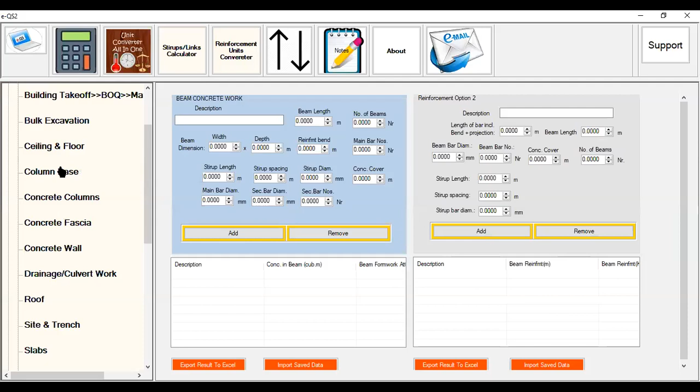Like I said earlier, most of the forms have similar interface. We are currently on column base. If you check beam and concrete in beam, they have similar interface. If you check ceiling and floor, they also have similar interface. They all have input, a button, and then the results below. Then you have two buttons below that allow you to export and import results.

So back to the column base, we start with the description. Before we input the description, let's look at a sample drawing.

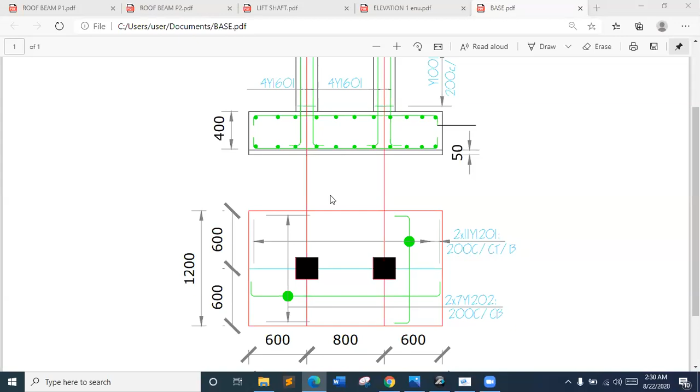Assuming we have this as a sample drawing, this column base has top and bottom reinforcement. Let's say this is BT2 that has top and bottom reinforcement.

Before we do that, we check the dimension. This is the length, and this is the breadth. This requires you to extract the data. This is group B data, which you can just read directly from the drawing. The length is 2 meters.

The breadth is 1.2 meters. The excavation depth is not shown here, so let's assume 1.5 meters excavation depth. The blinding is given as 50 mm blinding. The column base is given as 0.4 meters.

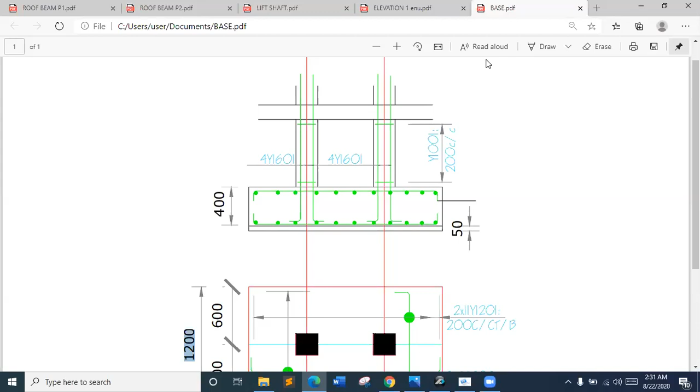Here we are assuming the bottom reinforcement is Y16, and the top reinforcement is Y12. The number of column bases here is just 2 numbers. So we input this data now in the software.

We start with a description. Description, you put base type 2 because we are starting with base type 2. As you can see, it says column base dimension, length. The length is 2 meters. Breadth is 1.2 meters. Number of work means number thereof, or number of occurrence of that particular item.

Which is base type 2 column base. From what we have here, it's 2 numbers, so you change this to 2. The next is the excavation depth.

The excavation depth we are using is 1.5 meters. Blinding from the drawing is 0.05 - it's 50 mm in the drawing, but you should be cautious of the units of measurement beside each of the boxes. Here the unit is in meters, so we have to convert it back to meters.

The next is the footing. The footing is supposed to - this is an error, this should be meters. So the footing is 0.4 meters.

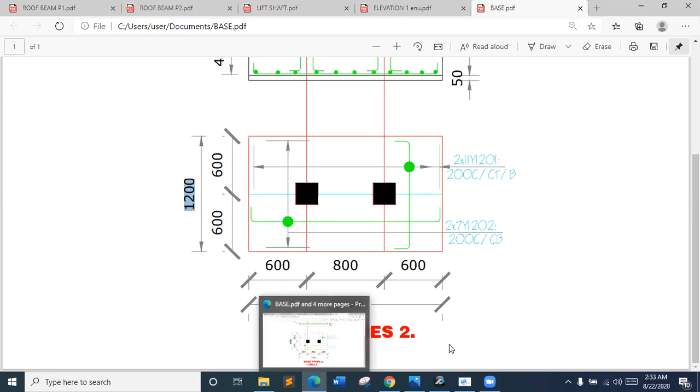Then the concrete cover - let's check if it's given here. Okay, the concrete cover is not given, but we can use 25 mm. When you convert 25 mm to meter, it's 0.025.

The next is length bar diameter. The column base has length and breadth, so this form even allows you to input different diameters. If, for example, the length side has Y16 and the breadth side has Y20, the software allows you to input different diameters. But in this case, the length and breadth have the same diameter, so we are using Y16 as the length bar diameter and Y16 as the breadth bar diameter. Then the spacing is given here as 200 centers to center.

So we change it to meters, that's 0.2. The length side spacing you provided, the breadth side spacing you provided. So when you are done, you click add, which is calculate.

So with that, we have the result in the form below. The description is for base type 2. The next is volume of column base excavation, 7.2 cubic meter. Then the next is leveling and compacting, 4.8 square meter.

You see, the result page here has columns and rows. Each of the columns, or each cell, has a title at the top, and the title has a unit of measurement. Here you see leveling and compacting, the unit is there. Anti-termite, the unit is there, which is in square meters.

Earthwork support, blinding, column base concrete, formwork to edges of column base, then the reinforcement also, because the software allows you to input a different diameter of reinforcement for the length side and breadth side of the column base.

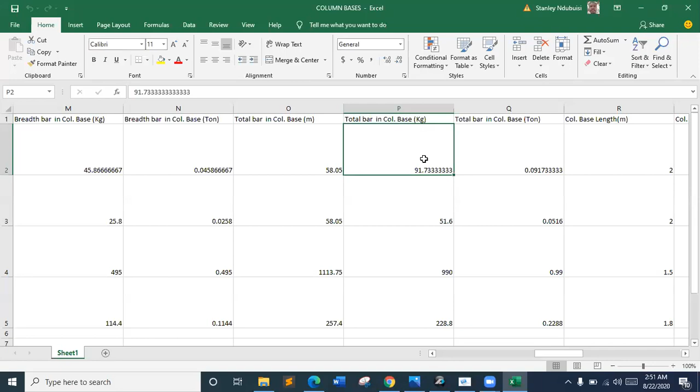If you are interested in the total, and you have the same type of reinforcement in the length side and the breadth side, you can get the total from here. So here the first row is Y16, take note of that. The second row is Y12, so you can decide to sum up all the Y12 rows.

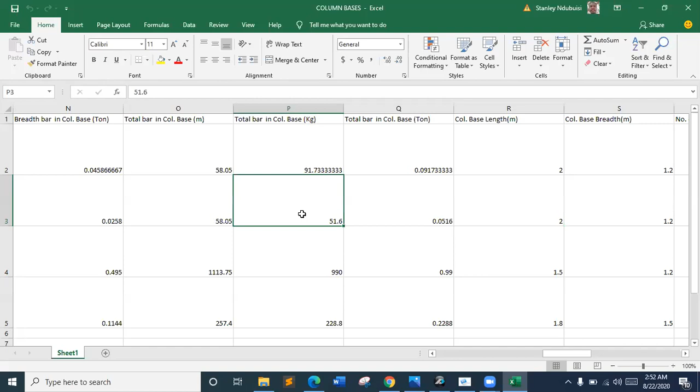The third, fourth, and fifth rows are all Y12, so you can navigate to the total reinforcement in kg. Since rows 3 to 5 are all Y12, you can just drag to sum, then record this on a sheet of paper. The total at the base here is 1270.4. Then you know the first reinforcement is Y16, and you record that. This is the last column that gives the values for results.

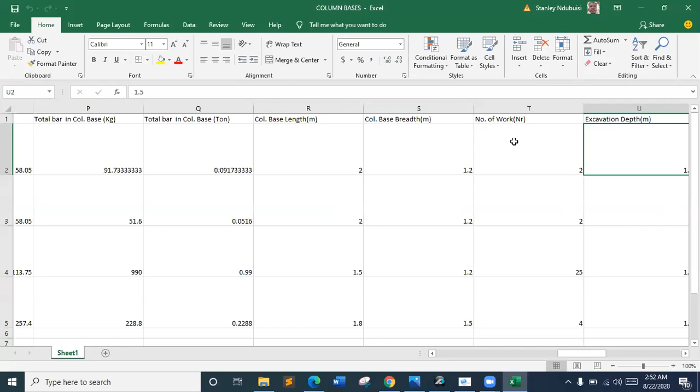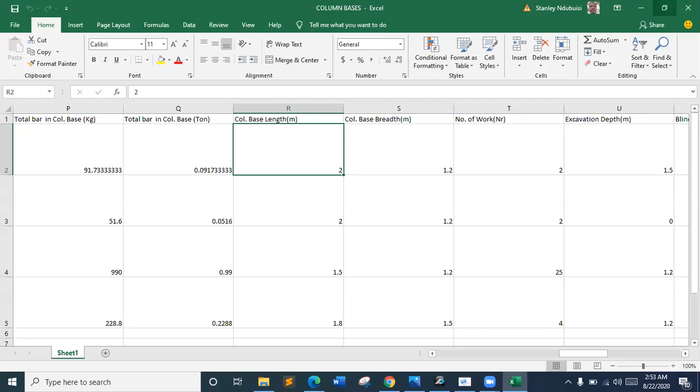The other columns are the input values, like the length of base type 1, the breadth, the number, and others. If you also want to make a correction, you can import this page back into the software and make a correction. To do that, you need to close the page first.

It's also important to save because if you click on any other form on the right side and go back to column base, the page will be empty. For example, if I click ceiling and go back to column base, you see it's empty. Or if you close the software and open it afresh, it will show a blank page.

But you can import the data you saved earlier by clicking import saved data. It can take you anywhere on your computer, but if you check and confirm you're on the right file path, just navigate to the appropriate folder and select the appropriate file. It will bring back all the data you saved earlier.

It's running all the data back into the application. Now it has returned all the data into the application. So if you want to make a correction, let's say on the first row, you click on it. Immediately, it will populate the input boxes with the data that yielded these results, so you can make any correction.

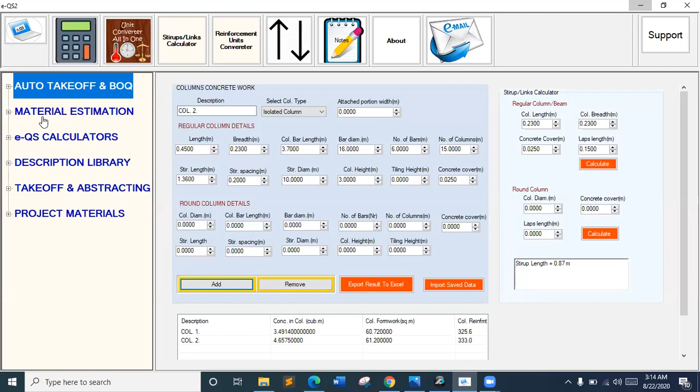If you want to open another page, you can minimize the software. So when you minimize, you go to your desktop. Okay, let me open the desktop. On the desktop now, you can open another page, so you can have more than one session running. If you hover your cursor at the icon at the bottom, you have 2 pages open.

You can open more than 2 pages. This one is for the column. You can decide to open another one and continue work, because as this one is running, if I click any page here, it's going to replace what we have here. But before we continue, we'll click save. So this is column, concrete column. We are still saving on the day 4 data page, day 4 data folder.

So let's say I want to continue on the new version, or new page I just opened. Let's say we want to continue with concrete wall. For concrete wall, it allows you to calculate or do takeoff for concrete formwork and reinforcement in concrete walls. Let me open a drawing.

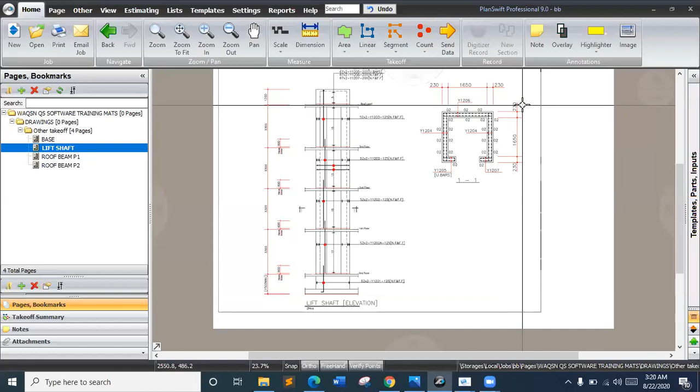So we move to concrete wall. For concrete wall, we are going to use this drawing. This is a lift shaft, concrete wall. So here we need some data.

When you click concrete wall, it allows you to select whether it's attached or isolated. Then next you need to provide the length of the wall, the height of the wall, the thickness of the wall, the number, or you can provide the area.

If you don't want to measure the length and the height, because some walls may be trapezoidal in shape, in that case, if you don't want to use the average height, you can just decide to measure the area and provide the thickness. So where you see 'or', it gives you another option. But for this case, we have the wall here.

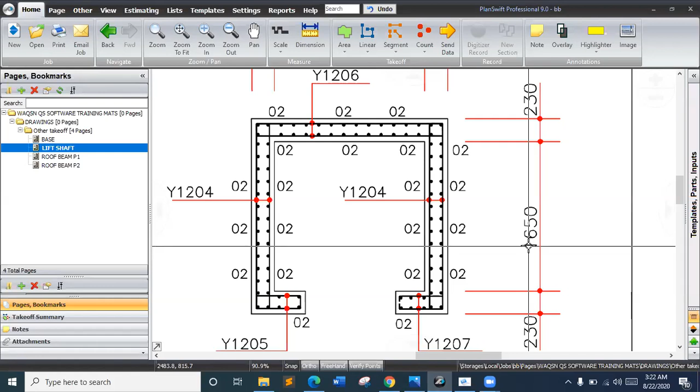So for the length of the wall now, the in-to-in dimension is 1.65. So we say 1.65. So now we are going to compute the total length. 1.65.

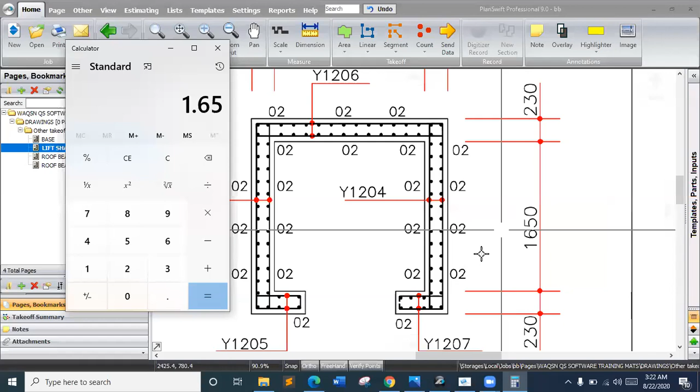Sorry Stanley, before we go far, what if the attached columns are on 3 or 4 sides? If there are 3 or 4 sides attached, someone wants to know why the result is not giving us stirrup details. I explained that recently - the stirrup details did not show in the first case because we did not fill in value for all the cells, that's why it brought out that error message. I'm going to do another one now, and you will see it will show the stirrup details.

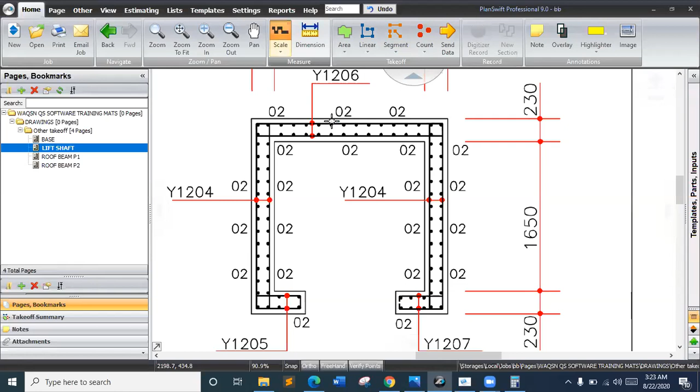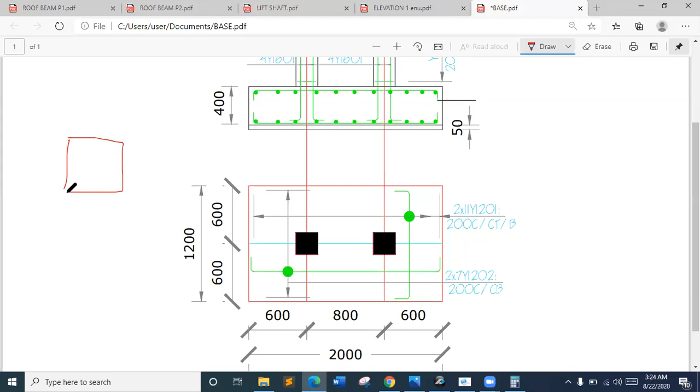Then for the question about if the formwork is attached on 3 sides, you are going to add the total of the 3 portions. Let's say, for example, I want to draw a sketch to further explain that. Let's say we have a column like this - so let's say this is the column, and you now have the attachments.

The attachment is attached on this side. Then it's also attached on this side. Then it's attached on this side.

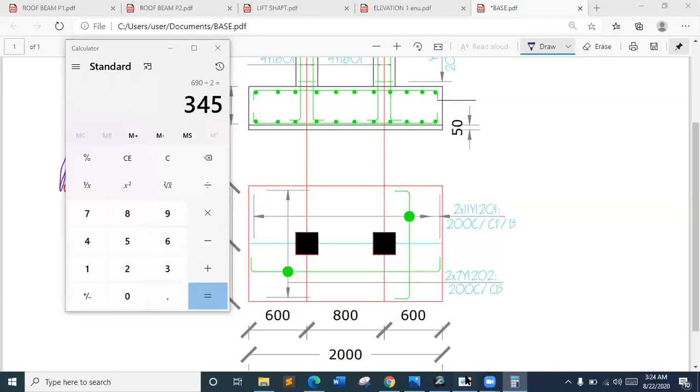So what you will do is, this column is 230 by 230. You add 230 plus 230 plus 230, that's 690. Then you divide 690 by 2, because it's 230 times 3 equals 690, then divided by 2, that's 0.345. So it is 0.345 you are going to put here as the attached portion width, because the software will multiply this value by 2, then multiply by the height of the column.

Then it will deduct that from the total formwork area. Originally, it will measure formwork for the 4 sides. Then after it measures formwork for the 4 sides, it will now compute this area that you have provided to be deducted. It will multiply this value by the height, then by 2. Then it will deduct the attached portion area from the total area. It will now give you...

Okay, let's experiment. Let's say we have column 4 in this case. Then let's say it is attached. Then the length is 0.23 by 0.23. The bar length is 0.7. The diameter is Y16. The number of bars is 4. Number of columns, let's say 22.

Stirrup length 0.87. I'm going to show you why the stirrup did not show in the first case. So 0.2, the stirrup spacing, stirrup diameter Y10. The column height, we are using 3 meters. Okay, let's say there is tie, 3 meters, then 0.025. If you don't have tie, you can put 0 there. Then you need to provide value in all the cells here. That's why it did not give us a stirrup length in the first case.

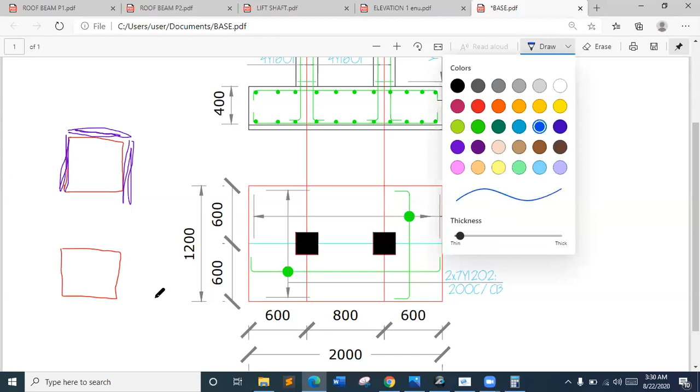But if it is attached on only 2 sides, let me give another scenario. Let's say we have column here, and this column is only attached on this side, the left side, and the right side. If you have this case, you don't need to divide by 2. You just provide this 0.23 as the attached portion width. Let me do another one. You change this to 0.23. So in this second case now, let's say this is column 5.

You don't need to divide by 2 again in this case, you just provide that 0.23. What I'm saying is when you provide this 0.23, it will multiply that value by 2, because any value you provide here, it assumes that same portion is attached on the opposite side. So when you provide 0.23, it multiplies this value by 2, then multiplies by the height of the column, then deducts that portion from the entire column width.

For example, now if I click add here, column 5, you see we have the formwork to be 30.36. That's because I provided 0.23 as the attached portion, so it multiplies this attached portion by 2 originally. So the reason why we have to divide by 2 is because we want the software to calculate for 3 sides, and it is programmed to calculate for 2 sides.

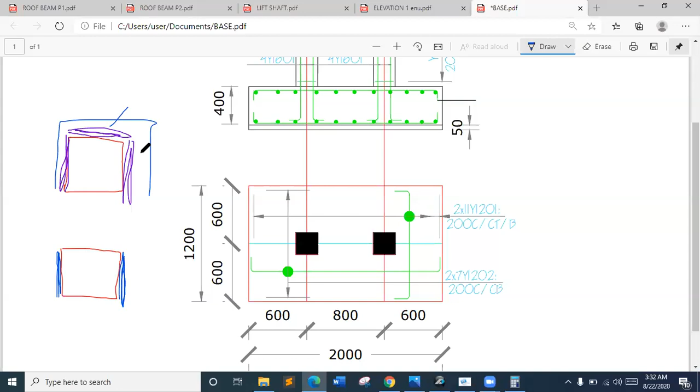That's why I said first you need to understand how it works so that you know how to use it. So to make it calculate for 3 sides, you take the length here, the length here, the length here, then you divide that value by 2. So you provide just the value for only this side, which I'm shading now. When you provide the width of this side, it is programmed to measure for the opposite side also, so this is the opposite side, it's going to measure for this side as well.

But in this case, you don't need to divide by 2. When you provide for this side, it will multiply by 2 and measure for this side as well. I hope that answers the question.

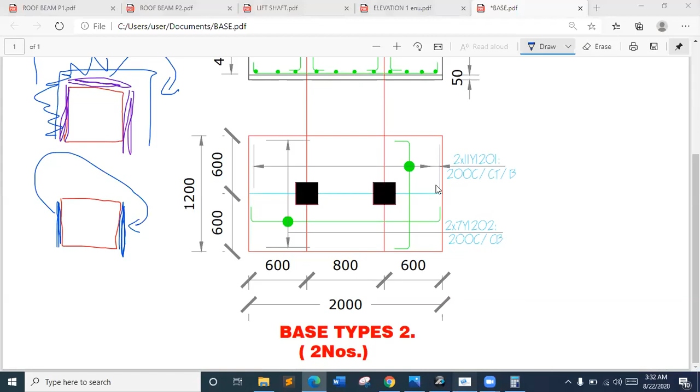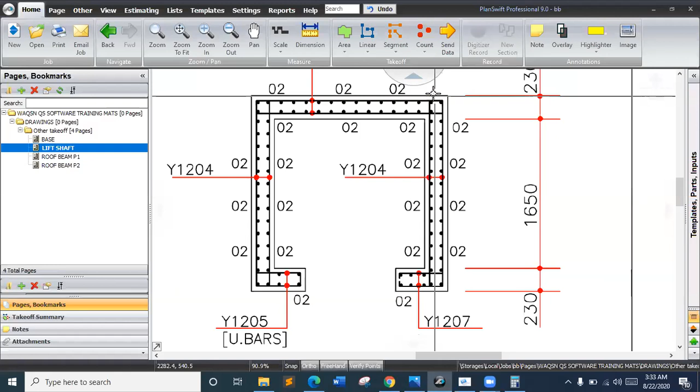Yes, let's go on, we take other questions later. So we're at concrete wall. For concrete wall, we need to measure the entire length. So this is the plan, and it shows us the thickness of the wall, 230 mm.

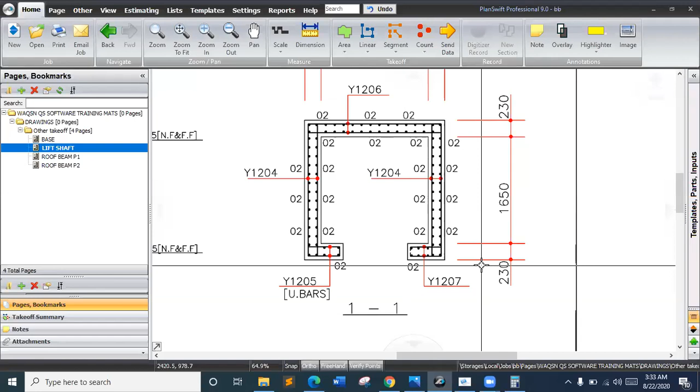Then the reinforcement is Y12 and is double reinforcement in the wall. So what we need to do now is measure the length of the wall, and it has an opening here.

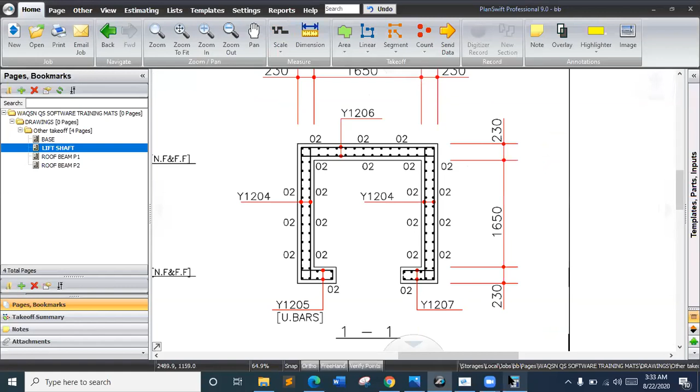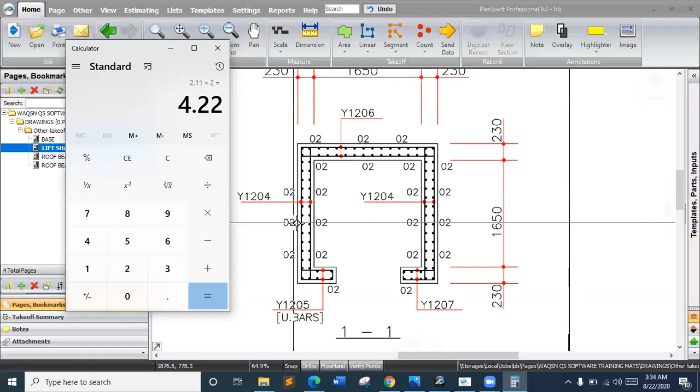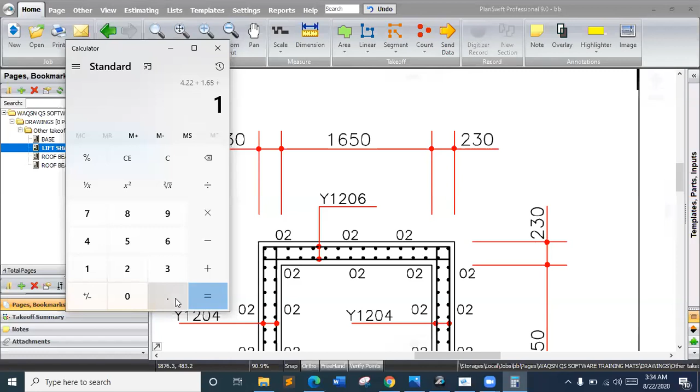So let me quickly measure the length of the wall. We can use a calculator to just sum up. Let's say this is 1.65, then plus 230, that's 2.11, then times 2, that's for the left and the right side. Then this one now, we are not going to take it out to out again, we just take it in to in. So here we have 1.65, then plus 1.65 at this side. So we have a total of 7.52 meters as the length.

So for the description, you say concrete wall, then you choose whether it's attached or isolated. Then the total length is 7.52, the height, let's say the height is 3 meters. The wall thickness is 0.23, the number of walls is 1. So if you provide values here, you don't need to provide values again.

I said where you have area, it says 'or area'. Maybe if the shape of the wall is not just square or rectangular, if it's trapezoidal or circular or some other shape that you cannot easily ascertain the length and height, you provide the area, the thickness of that area, the average height, and the number.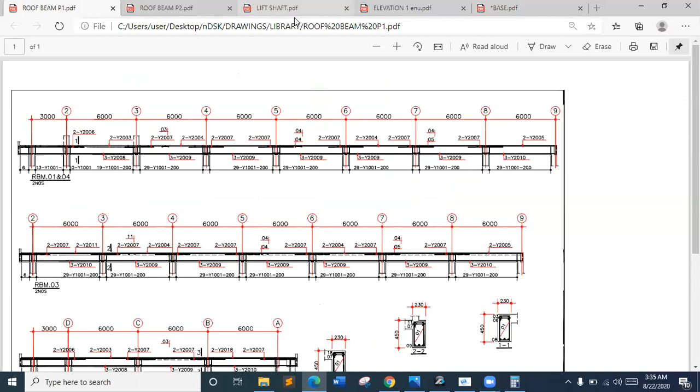Then opening, we have an opening in this case. If you check the plan, we have opening here, so the opening width is 0.9 meters. The length also means the width of the opening, 0.9. Then the height of the opening is 2.1 because it's a doorway. You also provide the thickness, 0.23, then the number is 1.

So when you provide all this, you hit add. So here it gives you the concrete wall concrete. What it does is it multiplies the length, height, times thickness, times number, then it will now deduct the opening. The volume of concrete in the opening will be deducted, so you now have an effective wall concrete. Same for the formwork, and it calculates formwork to the 2 faces of the wall, since the wall has 2 faces. It also deducts the formwork for the opening, then formwork to the edges.

If you have another wall, let's say wall 2, you can change the length. Let's say the length is 9 meters by 3 meters. It also has an opening, even if the opening is 2, you can change it to 2. So that's how you use this form.

Then the reinforcement form at the right side of the screen allows you to measure the reinforcement. We have, let me delete this, we have Y12 reinforcement here. So you say concrete wall Y12, here you choose whether it's single or double. In this case, the reinforcement is double, so we use double reinforcement. So the next is the height, the vertical wall height, we are using 3 meters. The horizontal length, we are using 7.52.

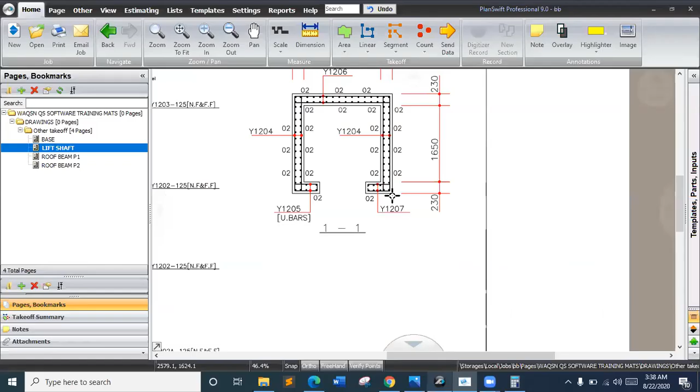Then the next is the horizontal bend. If you check the drawing, this is the bend I'm talking about. So this bend now, let's assume is 0.1 on this end, 0.1, 0.1.

So if we are allowing 0.4 for the bend, and you add 0.4 to this, you have 7.92. Then the vertical bar diameter is 12. Horizontal bar diameter is Y12. You see the unit of measurement is on the right side in millimeters.

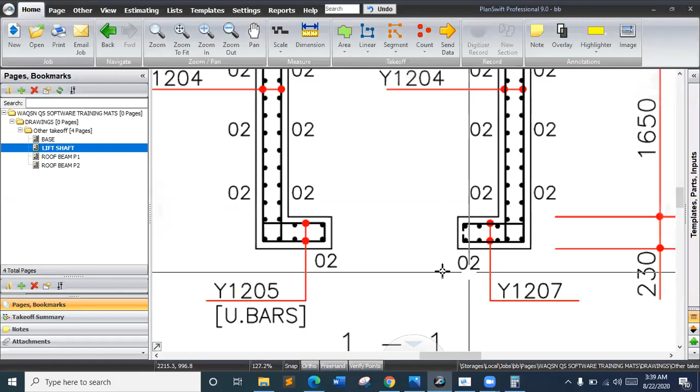Then the spacing, if you check, it's not given here, but we can assume 0.15 meters spacing on the vertical reinforcement and horizontal bar. Where you see bar, it means reinforcement. It's also 0.15 spacing. Concrete cover is also 0.025. Then the number thereof is 1.

So when you click add, it gives you the reinforcement in meters. The total reinforcement in meters is 325.12 in kg. This is for the vertical reinforcement in meters. Then the horizontal reinforcement in meters. Then now we have the total reinforcement in meters, in kg, and also in tons. So from here, we move to another item.

You can save. I didn't save earlier on, so let me save what we did for the concrete wall. So you hit export to Excel to save the reinforcement.

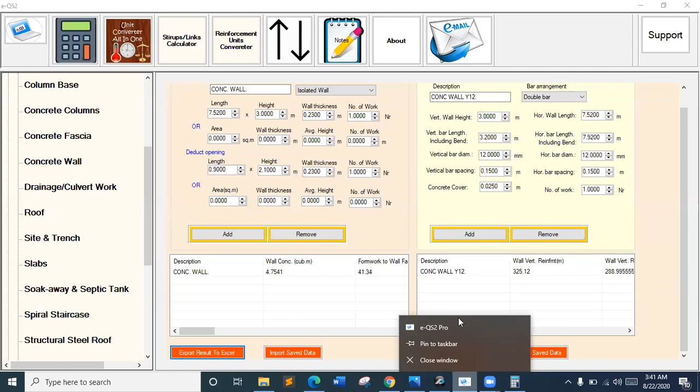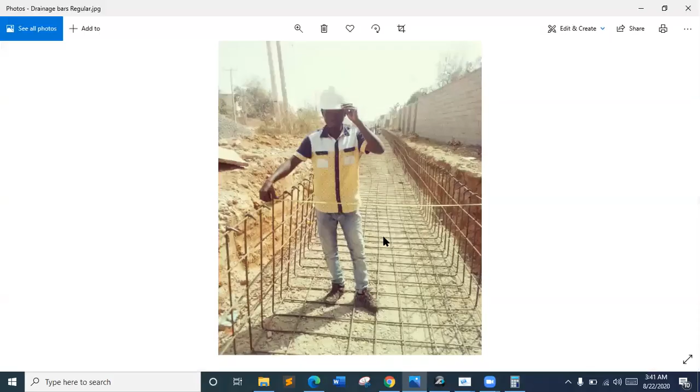So as it's saving, I'm going to open another form. We are going to work on drainage and culvert. This is the type of drainage and culvert.

So we'll make assumptions here. It's just a simple box drainage. So for this drainage, the software will calculate the earthworks, concrete work, and reinforcement. Earthwork in terms of the excavation, leveling and compacting, and others.

Then the concrete work, it will measure the blinding, the concrete in the base of the drainage, concrete in the opposite walls, and also in the reinforcement, it will measure the reinforcement in the drainage as we have here. This is the reinforcement. Then this is where it will give us the concrete and other details.

So the information we need here: we need the total length of the drainage, the depth of the drainage, the thickness of the two walls, the blinding thickness, the base thickness, and some other data like the spacing of the reinforcement and others.

We'll do it together. The drainage form allows you to choose the type of drainage. It's similar to the first form we worked on, which is the building takeoff form.

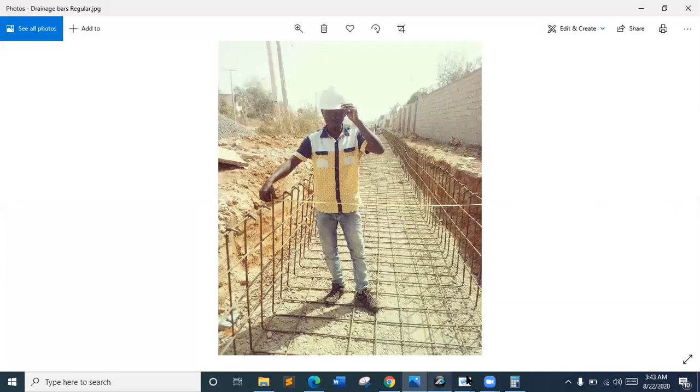This form has different pages, and the pages are accessed via these tabs. The first page is the regular shaped drain, which is what we have here. The second tab is ring, in case the drainage is a ring type.

Although most ring drainage are precast, which they bring and install on site, maybe you want to cast your own on site, which is in situ. You can use this form to work on the takeoff. Then if it is a trapezoidal drain, you use this tab.

Then this allows for measurement of apron wall, which is a regular shaped apron wall, trapezoidal shaped apron wall, and the apron slab. Then the next is the beam.

And what we mean by the apron wall is, we don't have it in this drainage. We have it in some other drain that has apron wall. After where you have discharge, you can have apron wall there.

So we start with regular shaped drain. In this case, you need to make some settings before you start. The first is the formwork. You need to choose whether the formwork is just for single face or if it is double.

Single face is when the concrete is cast against the excavated surface. In that case, you just provide formwork on one side. But double face is where the formwork is provided on two faces and the concrete is poured into it. So let's assume double face.

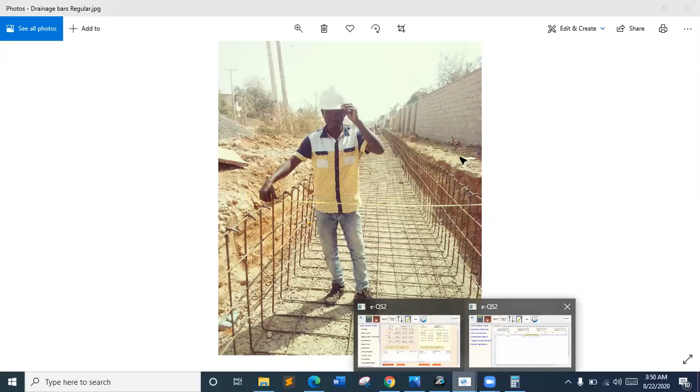So we can also add bend on 2 sides. If the reinforcement is not U-shaped, that means you need to add bend.

Hello, Stanley. Ma, we have like 10 minutes more. Okay, we can quickly round up. Okay, let's quickly round up.

Just the most important thing is to read the title on each of the cells and understand what is there. Then you input the appropriate value and you get your result. So let me just quickly round up this.

Then the spacing is also 1.5, 1.5. Then the drainage cover, we are using 2 meters by 1.5 by 1.2 meters. So let's assume the slab, the entrance slab has the same reinforcement as the member itself. Then the spacing is 0.15, 0.15.

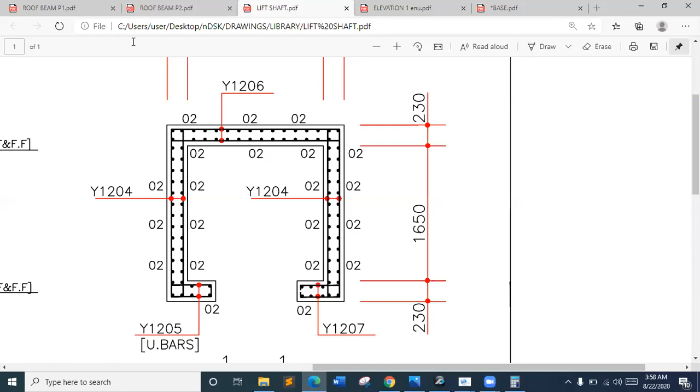Let's say the total beam length is 319 meters. Number of beams, 1. The beam width is 0.23. The beam depth, let's say you have 0.45 and 0.6 beam, so you can change the description to 450mm depth.

In this case, we have - sorry, I mistakenly clicked something else. Let me quickly open another form.